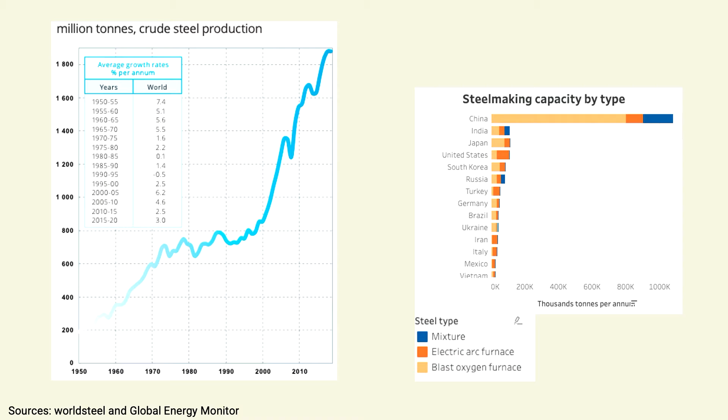The vast majority of steel is made in China. The US is the fourth greatest producer of steel, but third in apparent steel consumption. So what this means is that we import a great deal to meet our demand at home.

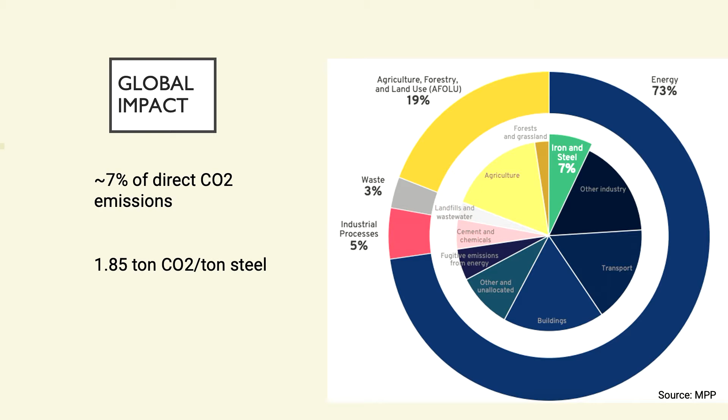The global steel industry is responsible for 7% of direct CO2 emissions, so it's a major contributor to climate change. Steel and cement are the most emissions-intensive industrial processes, and when I say emissions-intensive, I mean that for every ton of steel you create, about twice as much CO2 is emitted in the process. But this is a global average, and not all steel is made in the same way, as I had to find out.

There are three main methods to creating steel. You can create new steel, or you may recycle steel. But at its core, steel is reduced iron with a little bit of carbon sprinkled in for strength. To reduce iron, which is Fe2O3 or Fe3O4, you have to remove the oxygen from iron ore concentrate. And to do this, you need an element that is more willing to bind to oxygen than the iron itself. Think carbon, which likes to bind to oxygen to create CO2, or hydrogen to form water.

New steel production removes this oxygen via a blast furnace, as you can see on the left. This uses a reducing agent, typically carbon from coal in the form of coke, via high temperature combustion.

You may also produce new steel using a method known as the direct reduced iron process. This directly reduces iron using carbon from methane and natural gas without directly melting the metal. So it's a little bit less emissions and carbon intensive.

But you can also recycle steel in a process known as the electric arc furnace, where discarded scrap, most commonly from automobiles, is melted using electricity powered by natural gas, typically in the US, to be molded for new use.

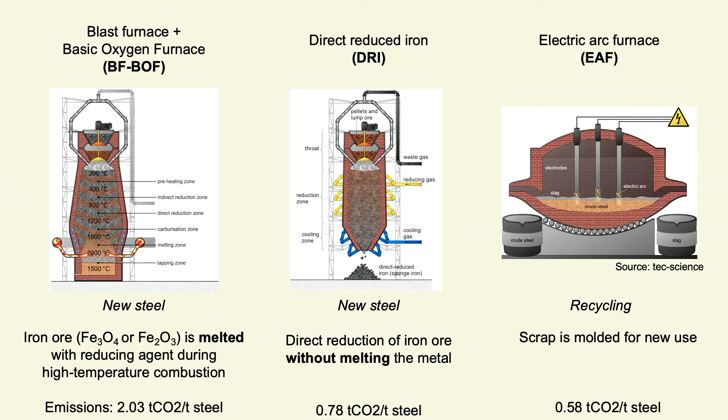It's difficult to reduce emissions from the steel sector because these plants have exceedingly long lifespans, they have a cheap feedstock in the form of fossil fuels, and they require high temperature combustion in the case of the blast furnace, basic oxygen furnace, and/or a strong reducing agent in the case of direct reduced iron.

The majority of steel in the United States is either recycled or imported. The US is the world's greatest net importer of steel, and 72% of our steelmaking capacity utilizes the electric arc furnace to recycle steel. If I'm saying steel too much, I apologize.

It's almost necessary. However, it's expected that demand for steel will increase between 25 and 50% by 2050, so there are concerns that our rate of recycling will not be able to meet this growing demand. This problem further cements our reliance on emissions-intensive steel imports unless we were to make fundamental changes.

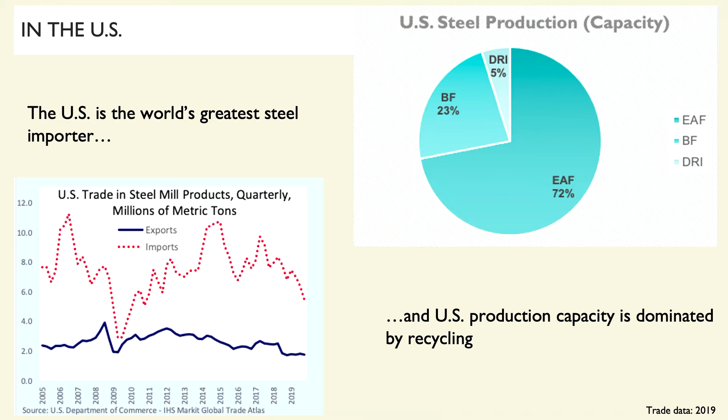To reduce emissions, the World Steel Association, the leading international trade body for steel, suggests 3 options to clean up the industry. These include improving efficiency at existing plants, maximizing recycling using the electric arc furnace, and developing and deploying low-carbon technologies. I believe the low-carbon technologies approach is the most underutilized because it would require the most fundamental changes.

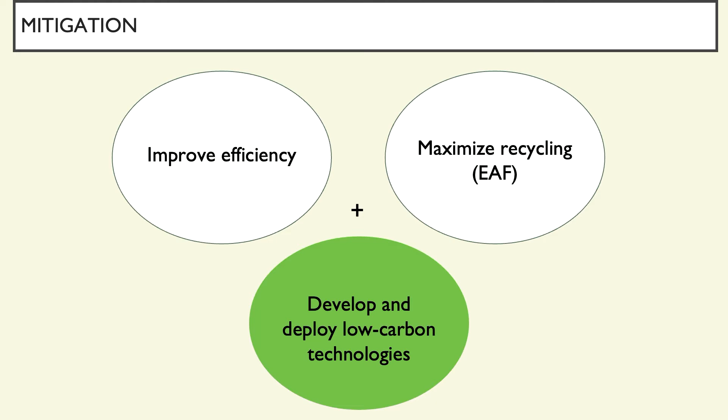It would require massive federal investment and policy to push steel companies to adopt new methods of production. Despite the challenge, however, countries around the world have already begun demonstration projects to showcase the viability of alternative technologies, one of which being hydrogen DRI. This is by no means the only method that's being researched currently to reduce emissions in the sector, but it is highly promising.

Hydrogen DRI is very similar to the DRI process we just discussed, which is direct reduced iron. Iron ore concentrate is pelletized into small pellets and then fed into a furnace for reduction to remove that oxygen, and melted in an electric arc furnace to remove impurities, add strength, and be molded.

Should the carbon from methane in the iron-making step be replaced with hydrogen, the system can achieve 70% emissions reductions, should the hydrogen be clean, which I'll get to in a minute. If the electric arc furnace step and the iron ore pelletization step are powered by renewable energy, the process itself achieves 92 to 95% emissions reductions compared to traditional blast furnace and DRI processes. This indicates just that.

This approach has shown viability in projects throughout the EU. Japan and China have showcased pilot projects as well, and demonstration projects and full-scale deployment are planned within the next 5 years around the world, but not in the US. The US has yet to invest in pilot projects or demonstration projects for hydrogen DRI. This is due in part to some of the limitations of hydrogen, most notably being the cost to produce it.

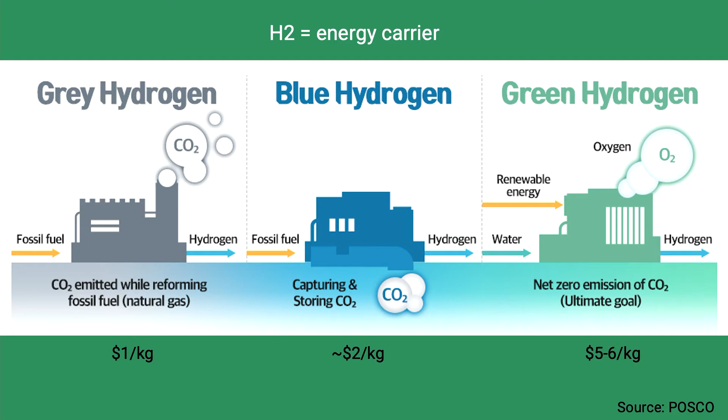Green hydrogen, meanwhile, utilizes water as the feed input of hydrogen and renewable energy-powered electrolysis to separate the hydrogen out. Oxygen is the lone byproduct. However, green hydrogen is extremely expensive compared to traditional methods, and it's not yet competitive.

In addition, there's really no penalty to create gray hydrogen using fossil fuels in the United States, so there's really no incentive to switch to green, whether that be in steel or elsewhere. But if we want to achieve net zero emissions and deeper decarbonization goals, green hydrogen must reach cost parity with the traditional gray hydrogen.

To better understand the future of H2, I analyzed technical reports from groups like McKinsey, Goldman Sachs, IEA, IRENA, and Bloomberg. Each report assumes a significant role for clean hydrogen in achieving our decarbonization plans. Fundamentally, demand for hydrogen is expected to increase, and the cost to produce it is expected to decrease.

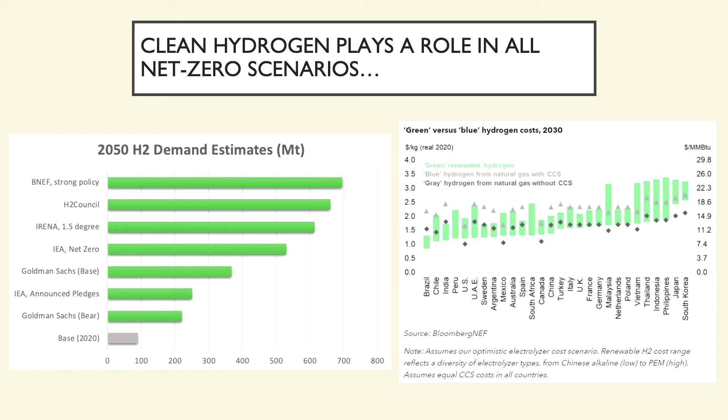Each predicts green hydrogen to reach cost parity with blue hydrogen at $2 per kilogram by 2030. Deeper policy incentives will support green hydrogen becoming cost competitive with gray. These forecasts, among other developments, have inspired over 30 national hydrogen strategies around the world, and countries have pledged to increase the capacity of hydrogen production 400 times its current level by 2030.

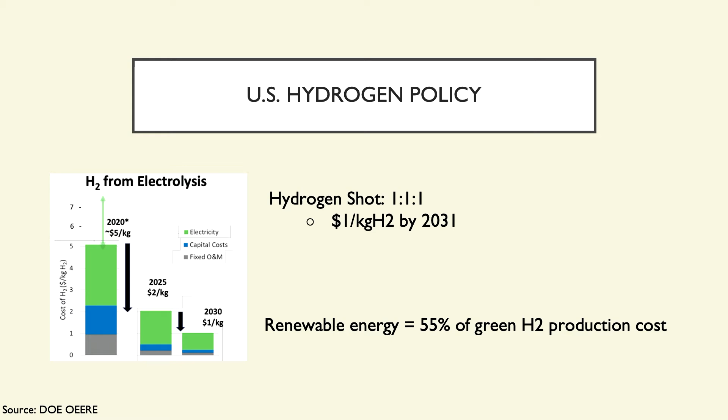The US does not currently have a hydrogen strategy nor commitments to increasing hydrogen capacity to a certain level. This is mostly because the vast majority of US hydrogen policy has focused on hydrogen fuel cells for passenger vehicles over the last 50 years. And we all know how many hydrogen-powered cars are on the road today.

The last 3 to 4 years, though, US policy has shifted to support lowering the production costs of clean hydrogen for diverse end use. For example, the Department of Energy's Hydrogen and Fuel Cell Technologies Office announced the Hydrogen Shot last year, which aims to reduce the cost of green hydrogen to $1 per kilogram by 2031. The DOE aims to leverage R&D, policy, and private capital to improve both the scale and deployment of clean hydrogen.

Another method to reduce the overall clean hydrogen cost and encourage deployment is to co-locate renewable energy resource generation to power green hydrogen production, and to co-locate those processes with its desired end use. The bipartisan infrastructure bill does just this.

The infrastructure bill authorizes $9.5 billion for clean hydrogen, including supporting R&D, a national hydrogen strategy for the US, and clean regional hydrogen hubs. The R&D itself will address clean hydrogen limitations, like production cost, and the hubs themselves will address the demonstration to showcase viability. $8 billion is authorized for at least 4 hydrogen hubs, one of which being green.

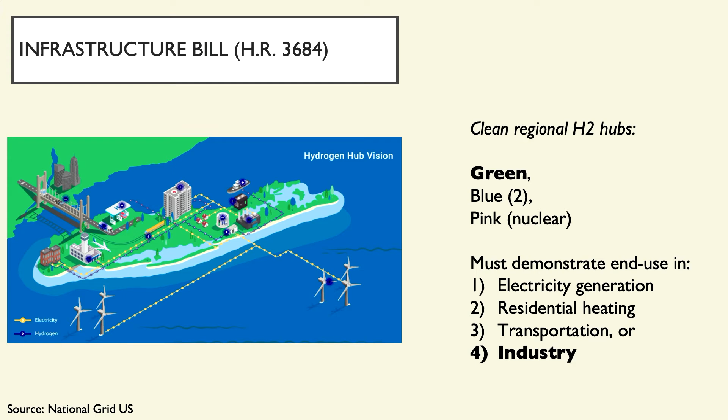And the green hydrogen hub must demonstrate end use in one of the following end use sectors: electricity generation, residential heating, transportation, or industry. Which leads to my recommendations. The green hydrogen hub should be dedicated for end use in the industrial sector, which would include steel production. As mentioned, the US has yet to support demonstration projects in hydrogen DRI, and the green hydrogen hub would create an opportunity to do so.

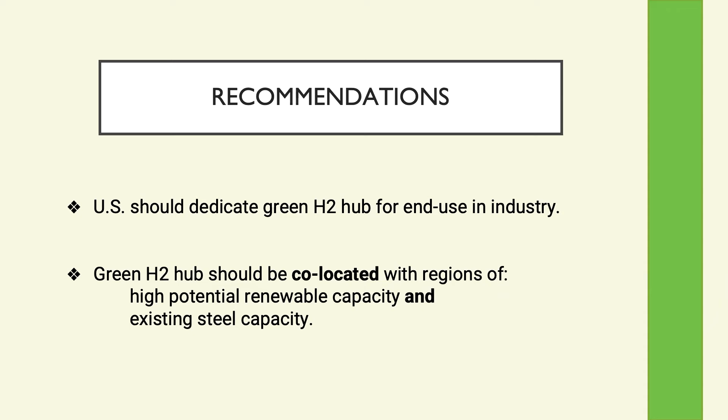But the green hydrogen hub should also be co-located with regions of high potential renewable capacity and existing steel capacity, as we have seen with the hydrogen DRI projects that have showcased success abroad that already utilize the electric arc furnace for that final step. This would also reduce transportation costs and efficiency losses.

The benefits of this endeavor are shown here. Onshoring steel capacity in the long term can reduce the United States' reliance on imports while increasing domestic production of a global commodity. Hydrogen hubs must demonstrate significant job creation per the infrastructure bill, which would support both creation and training of the blue-collar workforce.

The demonstration projects themselves would boost our competitiveness with other countries demonstrating low-carbon technologies. And in the long term, hydrogen DRI would eventually reduce emissions in the steel sector at a large scale, if implemented.

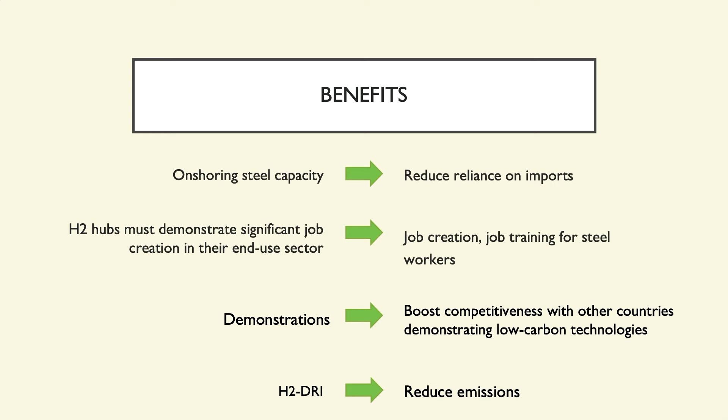So to demonstrate co-location, I developed these maps using data from the NREL and Global Energy Monitor to show existing steel capacity, which are indicated by the dots. The black dots indicate electric arc furnaces where that recycling takes place. Green is DRI.

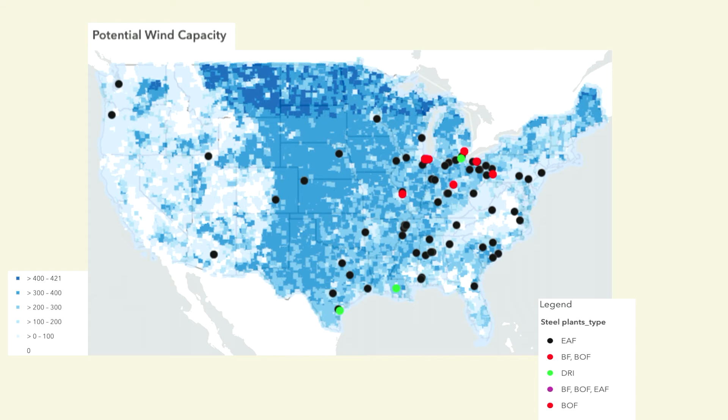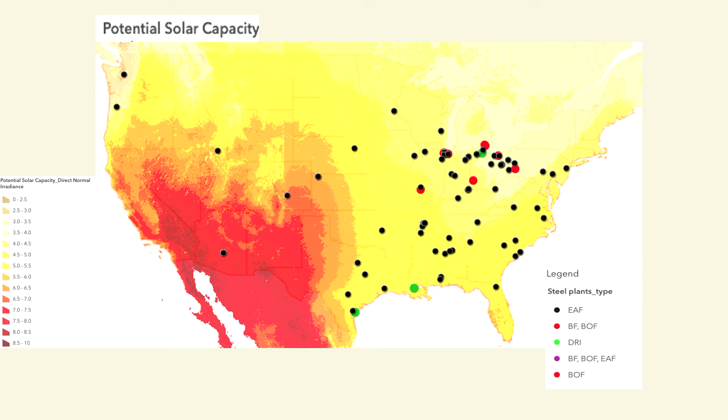Wind is especially strong in the Midwest, and Texas, Kansas, Nebraska, and Minnesota all have existing steel capacity. So these should be considered when choosing a green hydrogen hub. Additionally, this map shows potential solar capacity, which is very strong in the American West and Southwest. Arizona, Colorado, and Utah all have existing steel capacity. But should a hybrid option be considered, I believe Kansas is an excellent candidate because it has strong wind and solar and 2 electric arc furnaces.

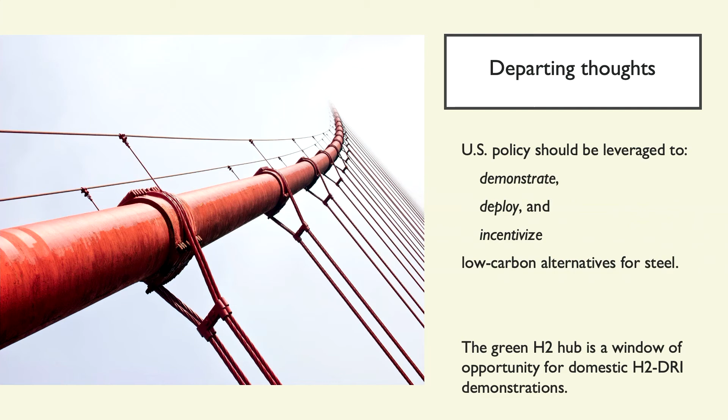So when I set out to do this project, I wanted to know how we could push the envelope forward. How do we reduce emissions from a sector as emissions intensive and as powerful and as big as steel? You can't just force steelmakers to make this switch, as we have seen in the United States. We need to leverage policy to first demonstrate the viability of alternatives, and then down the road, policy can be used to support deployment through actions like production tax credits, investment tax credits, government contracts with hydrogen DRI plants, and the like.

But in the meantime, we need to take advantage of the window of opportunity that is the Green Hydrogen Hub, which has opened up an opportunity for hydrogen DRI in a risky yet necessary step for decarbonization.